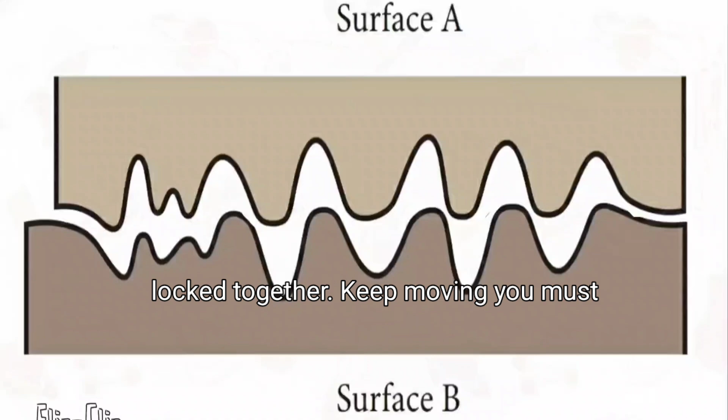Because for the first time, humans developed a life-changing truth: rolling is easier than sliding. When you slide a heavy box, microscopic rough points on the surfaces lock together. Keep moving, and you must constantly break those tiny bonds, which takes serious effort. But when something rolls, there's almost no scraping. The wheel simply moves forward, smoothly, efficiently. And just like that, transportation was born.

But there is always a but, the first wheel had a problem. Early wheels had a weakness. The wheel rotated on a wooden axle, wood rubbing against wood, which meant friction, heat, and very fast wear. So humans made their first upgrade. They placed a sleeve of soft wood or bronze between the axle and the hub and added grease or animal fat for lubrication. Was it a modern bearing? Not even close. But it was a step towards it, because even in ancient times, engineers were fighting against friction.

Solid wheels worked, but they had one major flaw: they were heavy. So around 2000 BCE, chariots introduced one of the greatest upgrades ever, the spoked wheel. Suddenly, wheels became lighter, and lighter means faster. Here's the science behind the glow up.

A wheel's resistance to spinning is called moment of inertia, and it depends not just on how much mass you have, but where that mass is sitting. Mass far from the center resists rotation much more. So spoked wheels did something brilliant: they removed heavy wood from the rim, kept the strength, and reduced inertia. Less inertia means quicker acceleration. That's why bicycles even today still use spokes. Some designs just don't go out of time.

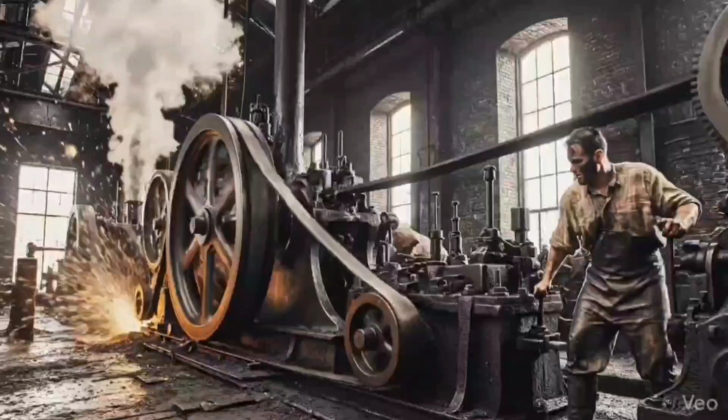For centuries, wood ruled transportation. But then came the Industrial Revolution, and suddenly everything got heavier, faster, more demanding. Wood started showing its limits. It absorbed moisture, it warped, it failed under extreme loads, and metal became the future.

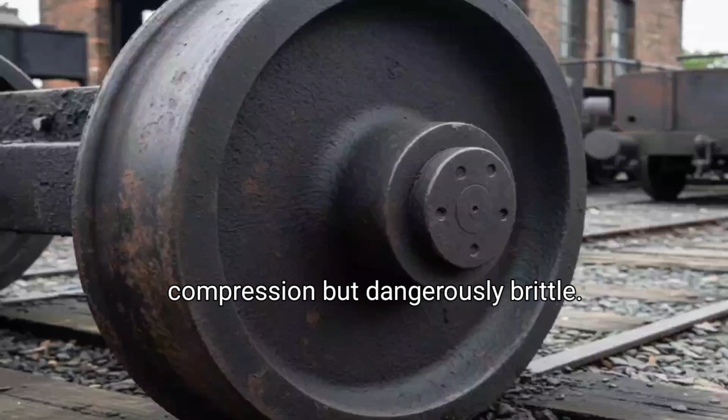Then railways entered, and rail transport pushed wheels harder than ever before. Early railway wheels were cast iron, strong in compression but dangerously brittle. Engineers improved them. First came wrought iron rims, then by the early 1900s, steel took over completely. Stronger, tougher, safer.

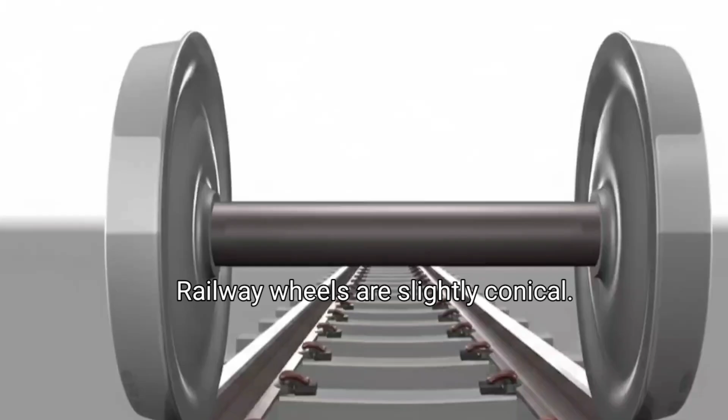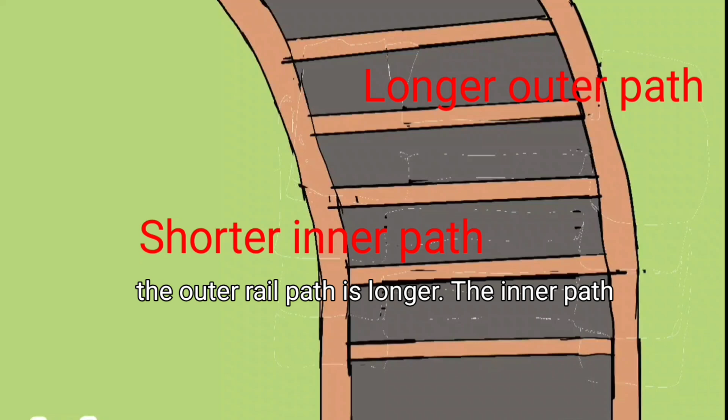Now here's one of the most brilliant designs in history. Railway wheels are slightly conical. Why? Because both wheels are fixed to one axle. They rotate together. But on a curve, the outer rail path is longer, the inner path is shorter. A cylindrical wheel would slip, so it's designed slightly conical. When the wheel set shifts slightly, the inner wheel rides on a smaller radius.

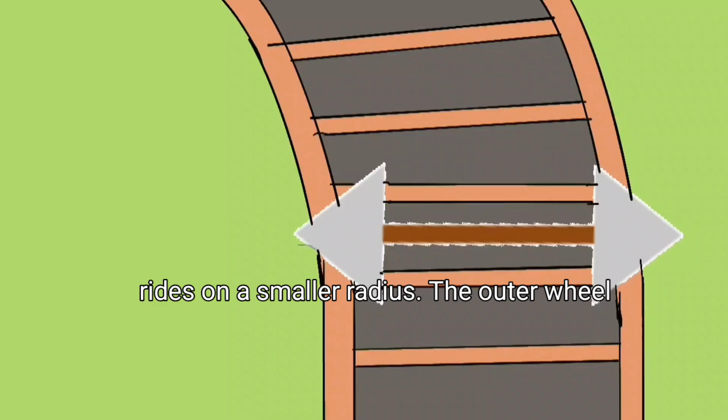The outer wheel rides on a larger radius, so the outer wheel naturally travels further. No sensors, no electronics, just pure geometry doing this. This has been working reliably for more than 200 years.

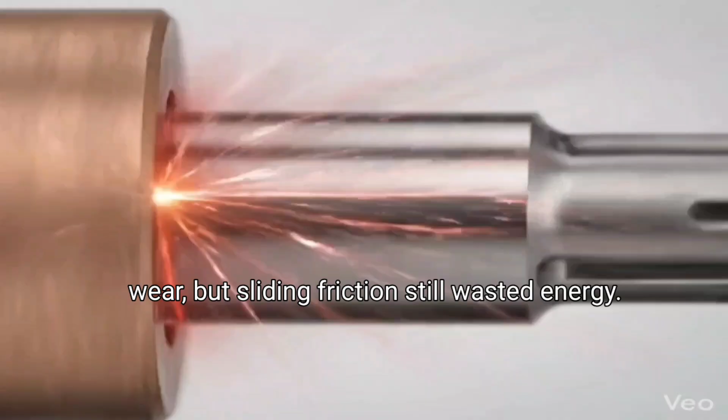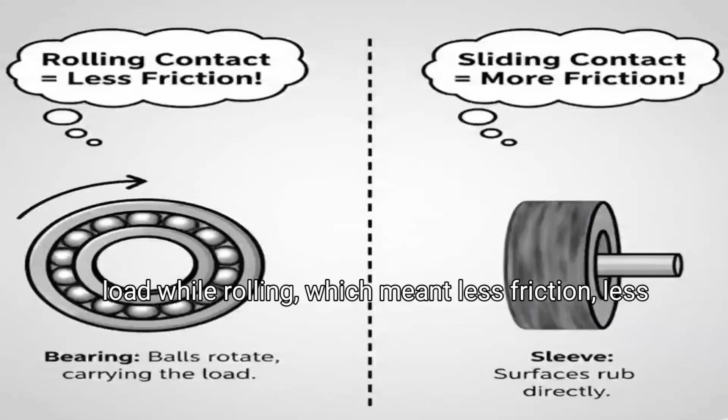Now here's the hidden breakthrough that made modern speed possible. Sleeves helped reduce wear, but sliding friction still wasted energy. So engineers introduced rolling element bearings. Instead of sliding, tiny balls carried the load while rolling, which meant less friction, less heat, far greater efficiency. By the early 1900s, wheel bearings became essential for every vehicle hub. Without bearings, modern transportation simply wouldn't exist.

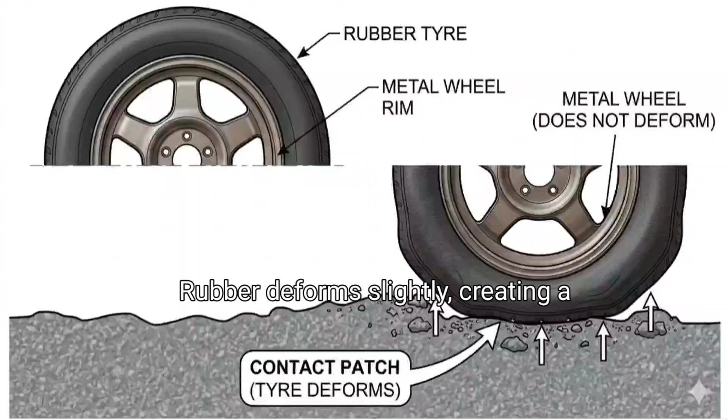In 1885, Carl Benz built the first practical motor car. It used solid rubber tires around its wheels. Because metal wheels on road create zero grip, rubber introduced something critical: traction. Traction simply means grip. Without grip, a wheel slips instead of moving, skids instead of braking, slides instead of turning. Rubber deforms slightly, creating a larger contact patch and locking into tiny road irregularities. That grip made automobiles controllable.

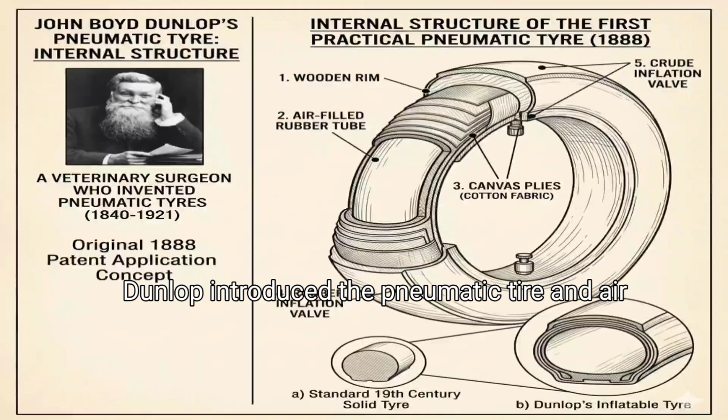But solid rubber had a problem: it was hard. Every bump hit the vehicle directly. Not exactly a smooth ride. Then in 1888, John Dunlop introduced the pneumatic tire, an air-filled tube inside the tire. Air turned out to be nature's perfect shock absorber. Pneumatic tires improved comfort, traction, and speed. Because along with speed, comfort became an important criteria. The modern driving era began.

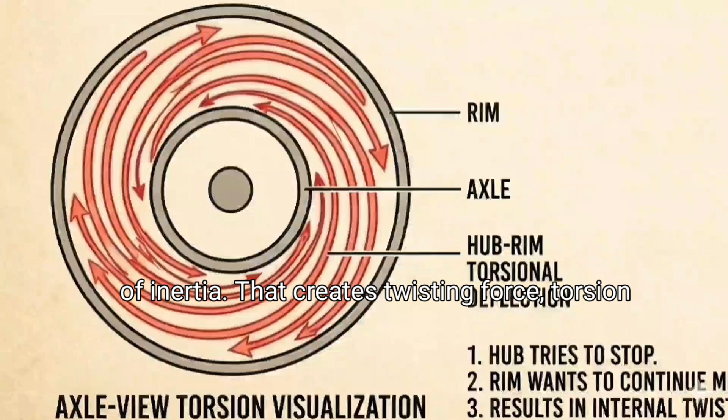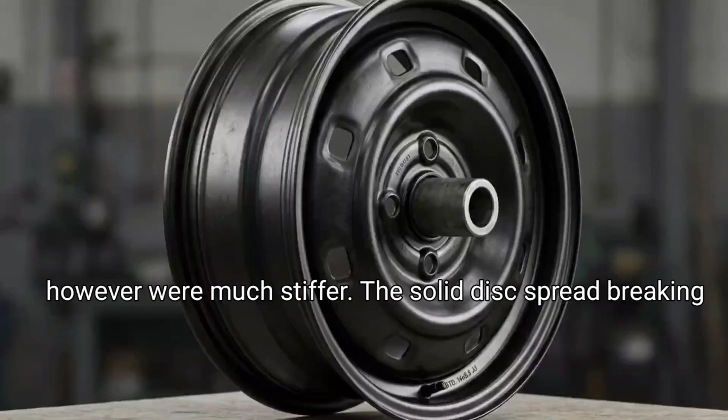Early cars mostly used wire-spoked wheels: light and elegant at first. But braking exposed their weakness. When brakes are applied, the hub tries to stop instantly, while the rim and tire still want to move forward because of inertia. That creates a twisting force, torsion, inside the wheel. Wire spokes could flex under this stress. Pressed steel disc wheels, however, were much stiffer. The solid disc spread braking torque across the entire wheel, resulting in a stronger, safer, cheaper wheel, perfect for mass production. And just like that, disc wheels took over.

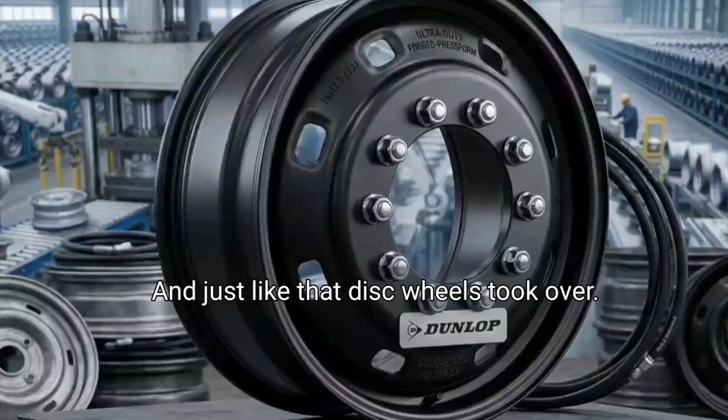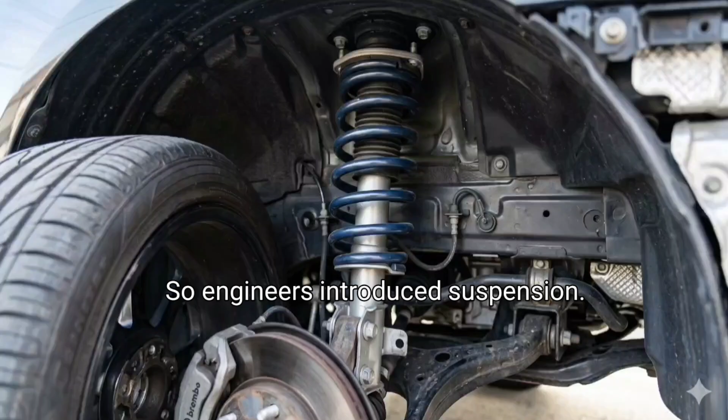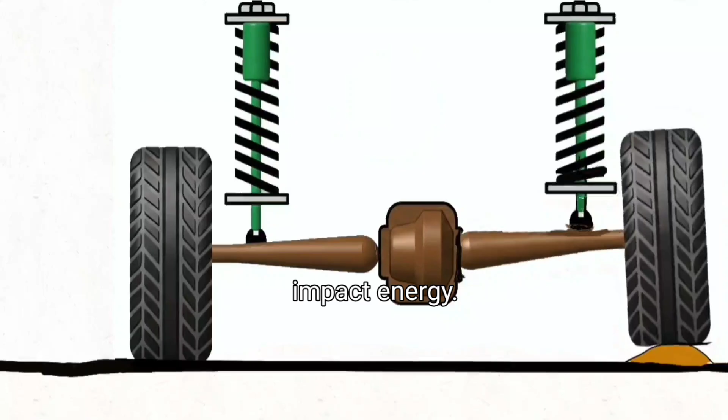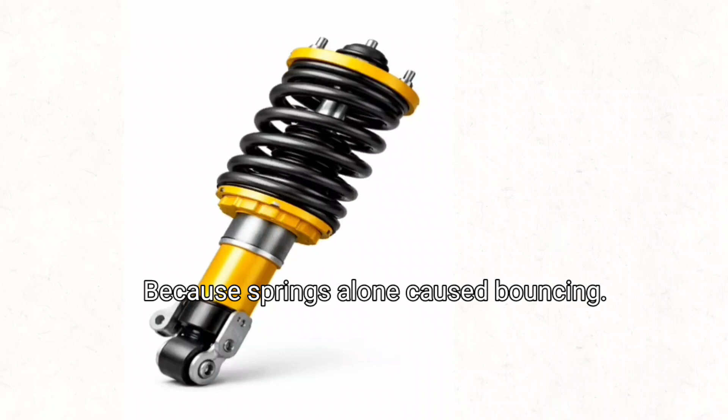Cars were faster now, but roads still rough, and speed without comfort is basically torture. So engineers introduced suspension. Suspension springs act like energy buffers between the wheel and the car body. When a car hits a bump, the wheel moves up, the spring compresses and absorbs the impact energy. Then the spring expands smoothly, releasing that energy gradually, and wheels move, but the car body stays relatively calm. Is the problem solved? Not yet, because springs alone caused bouncing. So engineers added shock absorbers. Shock absorbers act as dampers, turning oscillation energy into heat and stopping endless bouncing. Spring absorbs, shock absorber controls. Finally, comfort was engineered.

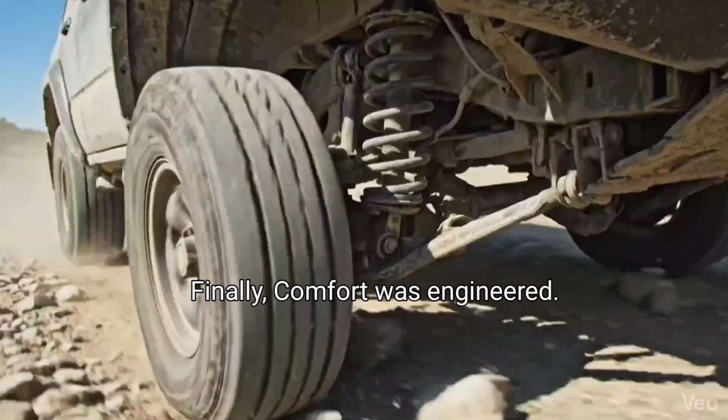By the 1920s, another safety upgrade appeared: tire tread grooves. On wet roads, water forms a thin film between tire and ground. If the tire can't push that water away, it starts to float and grip disappears. Grooves act like drainage channels, squeezing water sideways and backward, keeping rubber in contact with the road, which improves wet grip, braking, and cornering stability. Small lines, big safety.

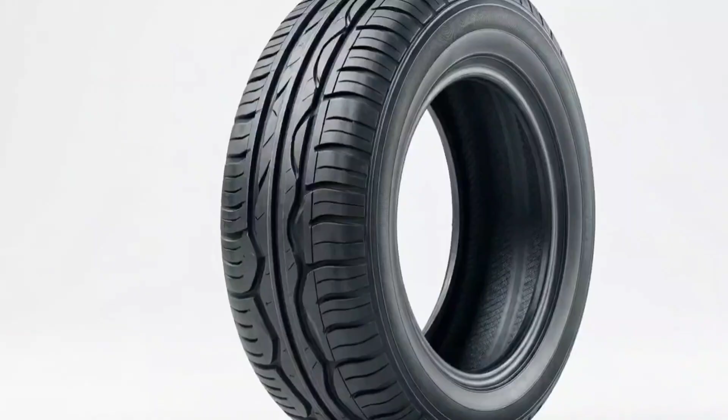Tube tires had one dangerous flaw: a puncture could cause instant collapse because the air lived inside a thin inner tube, basically like a balloon. One nail puncture and boom. Tubeless tires changed the game. No separate tube, the tire itself holds the air using an airtight inner liner and bead seal. And when a nail punctures the tread, it often stays stuck, acting like a plug. So air leaks slowly, giving the driver precious time to stop safely. By the mid-1950s, tubeless tires became the global standard.

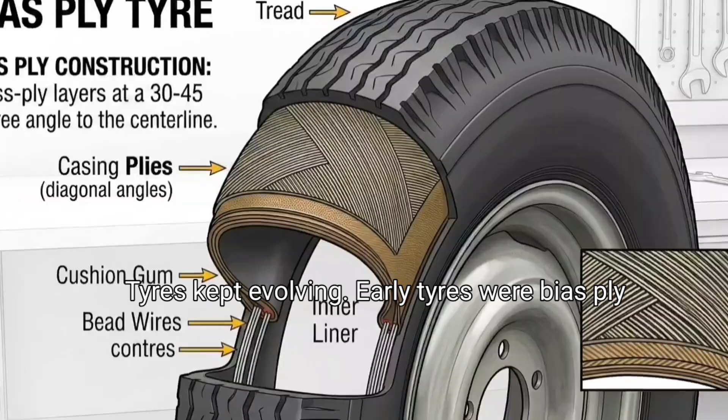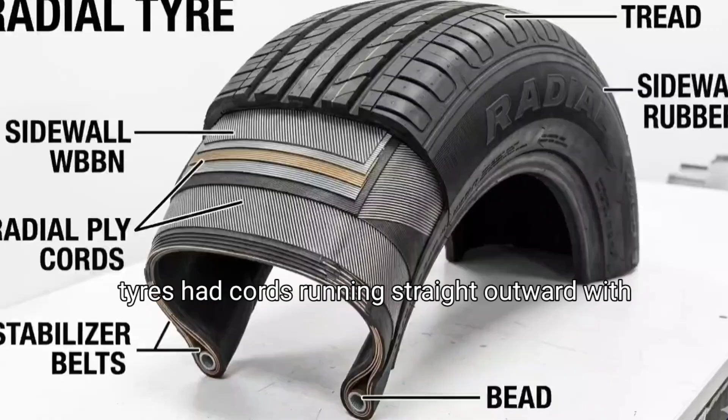Tires kept evolving. Early tires were bias ply with cords laid diagonally. They overheated and wore quickly. Then in 1946, Michelin introduced the radial tire. Radial tires had cords running straight outward, with steel belts under the tread, resulting in better grip, less heat, and longer life. Radial tires have now become the modern standard.

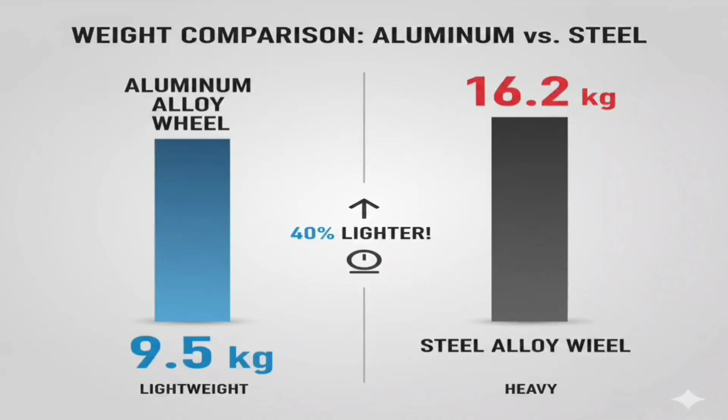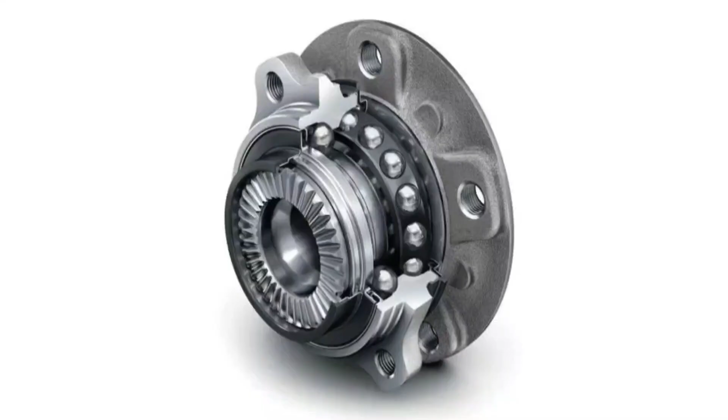Steel wheels ruled for decades, but manufacturers wanted lighter options. In the 1960s, aluminum alloy wheels entered, about 40 to 50% lighter than steel, which improved handling, brake cooling, and fuel economy. Aluminum alloys quickly became the new favorite. And today the wheel is still revolving. Some supercars now use carbon fiber wheels, which are ultra light, ultra strong, and ultra expensive, because the story of wheels is still rolling forward. From wooden slabs to spokes to steel to bearings to rubber to air to suspension to grooves to radial tires to carbon fiber, the wheel isn't just a circle. It's the story of civilization moving forward, one revolution at a time.